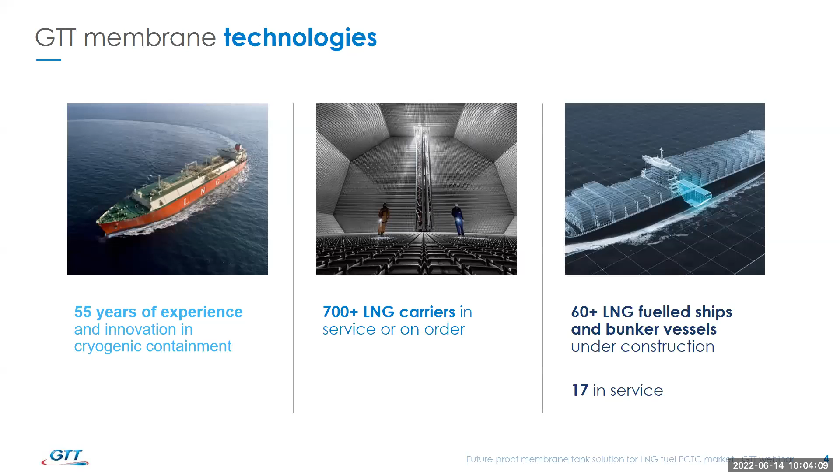What we see here is a successful milestone in the expansion of LNG as a marine fuel. It is a new reference on many aspects. World's biggest dual fuel vessel, biggest dual fuel engine, and biggest LNG fuel tank, alongside the biggest LNG bunker vessel. In November 2020, the CMA CGM Jacques Saadé, the first dual fuel ultra-large container vessel, loaded a full bunker of LNG from the Gas Agility chartered by Total, and it is more than 17,000 cubics of LNG, nearly 8,000 tons, transferred in about half a day, more than 5,000 TEU loaded while bunkering.

The LNG autonomy is such that the ship is able to complete an 84 days round trip between Asia and Europe without refueling. And here, you can see what's inside the LNG tank of this container vessel, a very wide tank of almost 52 meter breadth. The Jacques Saadé and all our sister ships are equipped with our Mark III membrane technology, benefiting from an excellent track record at sea. Those 9 vessels built in China are now successfully operating between Europe and Asia, and some of them actually already bunkered bio-LNG.

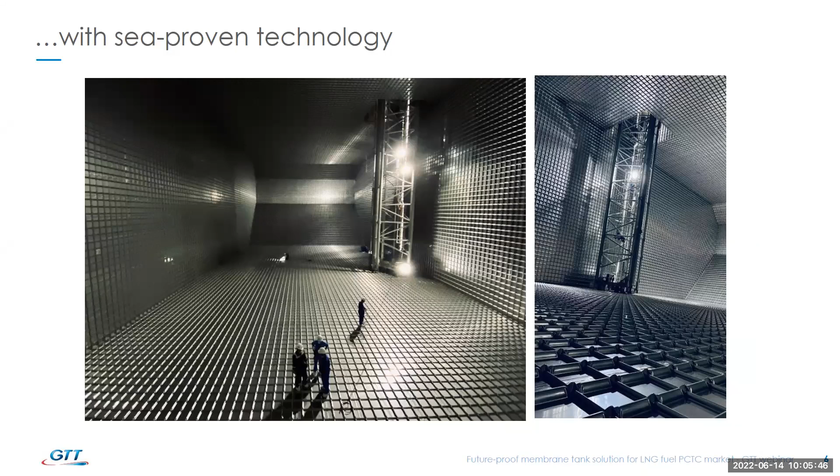Let's have a wider look at our references and order book. So it started in September 2017 when CMA CGM confirmed adopting LNG as fuel for this 23 kTEU. We are very happy to be a trusted partner for CMA CGM, who ordered a large number of additional vessels in 2019 and early 2021. Another great news was our first order in Korea with Seaspan, ZIM, and Samsung.

After mid-2021, we see a clear change with Korean yards turning back to membrane for new orders of containership. Even smaller size, such as the recent 7,000 to 8,000 TEU orders, equipped with smaller tank of 6,000 to 7,000 cubics. And actually, I did not include the additional container orders that we received a few days ago. But what about smaller size of tank?

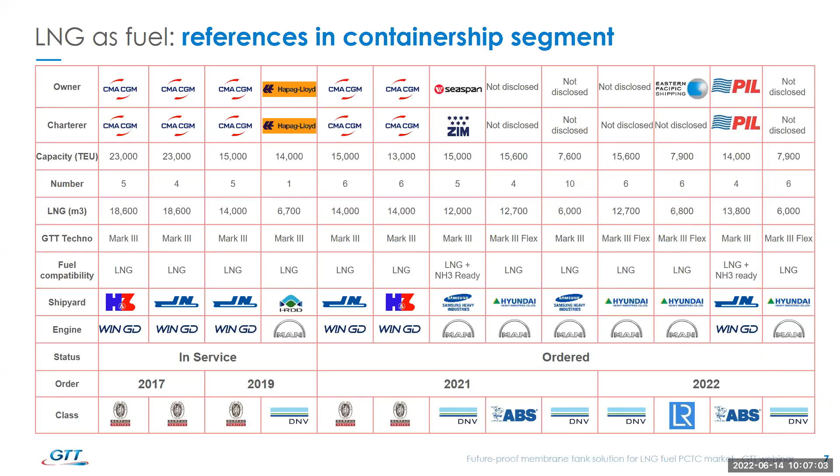On another ship type, GTT received an order from VARD of the Fincantieri Group for the most advanced expedition vessel of Ponant. This first cruise project, the design pressure of the tanks has been increased to 2 bar gauge for additional flexibility. This is a solution that we can now propose for tanks of a few thousand cubics, and we will develop more this point later on this webinar.

But let's see what is really making the difference. Initial ship arrangement included 2 bilobe Type C tanks. Due to standard shape, they can hardly store 3,000 cubics of LNG. Membrane tanks can store 4,500 cubics and save hundreds of square meters of deck on top of that, as you can see here.

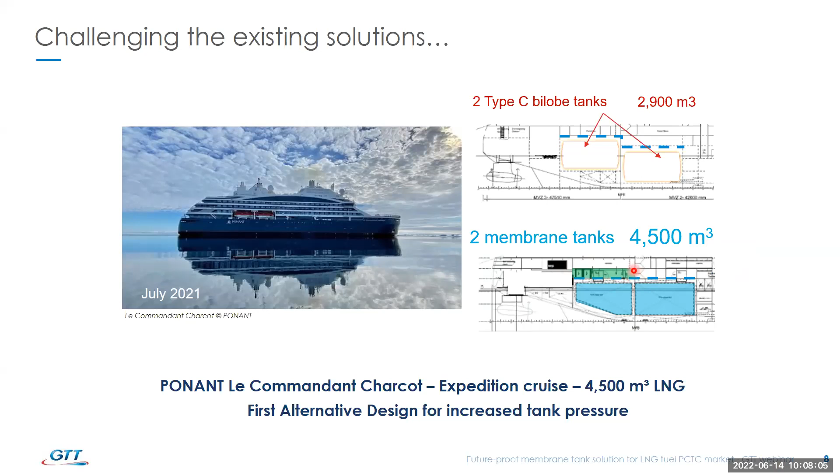And this is what the aft tank looks like when it's completed. We can see the specific tank slope, which efficiently follows the body lines for the aft tank, while the fore tank here has a pure rectangular shape. GTT Mark III Technologies allows to build LNG tanks with exotic shape to maximize the volume of LNG loaded on board. Thanks to these references, we are learning a lot, and we are now able to propose an efficient solution for the PCTC market.

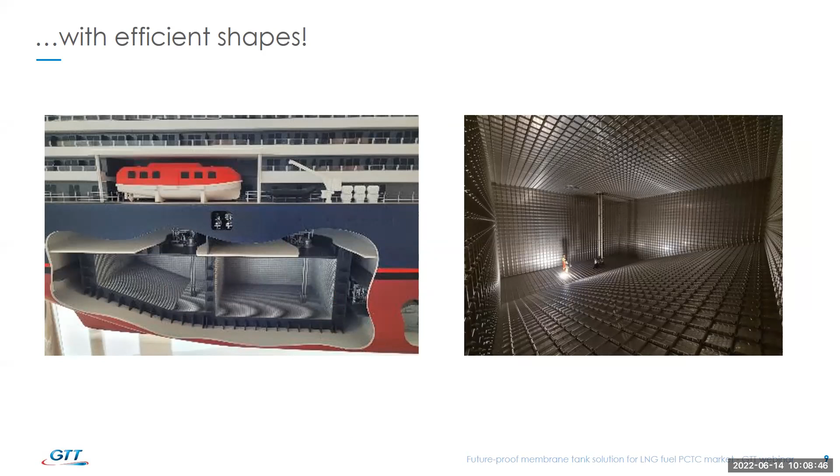So what does the PCTC market look like today? On this picture, you can see another of our references, the first bunker barge in the US, Clean Jacksonville, bunkering in February 2021, CMA CGM LNG powered PCTC equipped with Type C tank.

If we look at historical car carrier orders, we see that the market was very active between 2004 and 2007, and slowed down afterwards with a very low number of orders between 2016 and 2020. And it is currently very active again, with close to 40 ships ordered in 2021 and already 14 in 2022.

As it is stated here, the average age of the fleet is 16 years. So in the coming years, market analysts are forecasting that close to 30 ships will be ordered each year for fleet renewal, and also in order to comply with upcoming stringent regulations. Another very interesting point to notice is that the PCTC market has been the first one to operate a complete switch to LNG propulsion. 98% of the order book is LNG fueled, and all orders since 2021 have been ordered with LNG dual fuel engines.

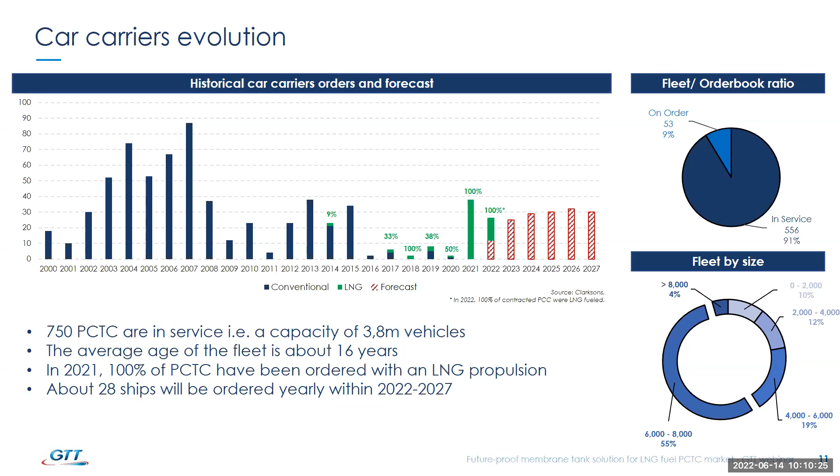If we have a look at PCTC ship owners, we can see that about 40% of vehicle carriers in service are owned by Japanese companies, followed by Norway. 50% of vehicle transportation capacity is owned by 7 players, quite equally spread between them. It is not exactly the same repartition for order books that you can see here, but there is still a majority of Asian owners.

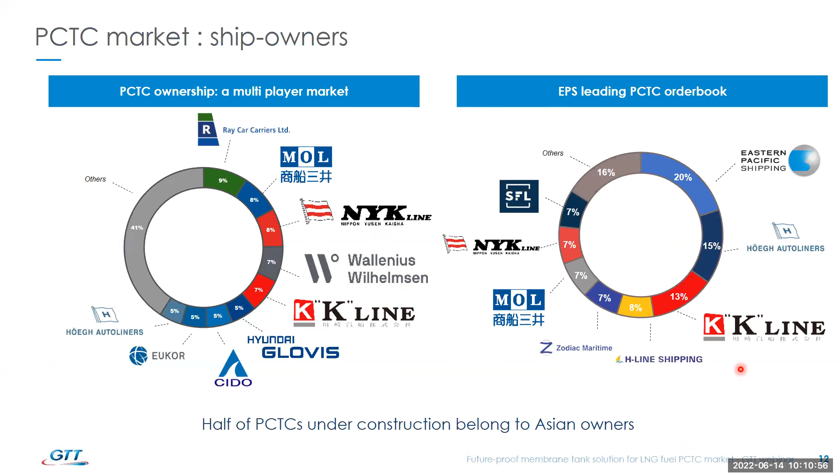Studying the main maritime routes of car carriers, we noticed that the main ports of call are in Asia, in Europe, and in North America. Considering round trips, we then estimated the endurance needed to reach these main hubs. In the end, we calculated the required LNG capacity to cover round trips between these areas. Having the possibility to perform round-trip voyages allows to save time and money, offering additional flexibility with the possibility to choose where to bunker depending on LNG price, and less bunkering operations needed. Finally, we ended up with a need for an LNG tank in the range of 2,000 to 6,000 cubics, depending on the trade.

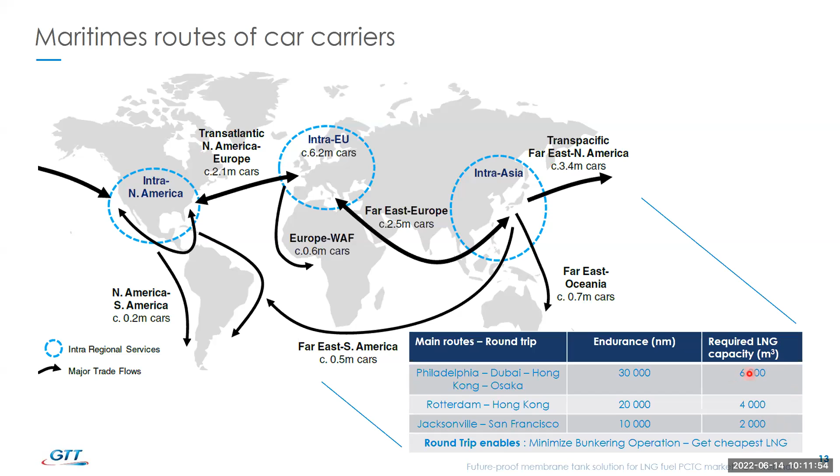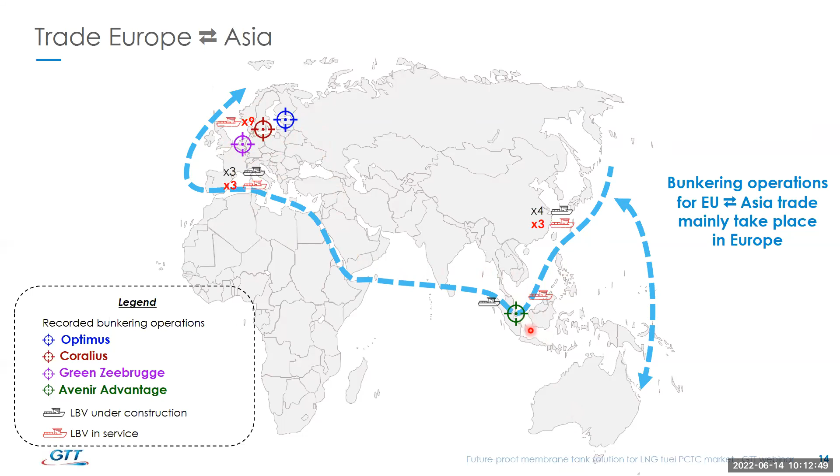We will now make a focus on the three main trades and track the bunkering possibilities in addition to the recorded ones. Here is a trade between Asia and Europe. It is to be noted that at both ends, LNG bunker vessels are already available and able to bunker LNG fueled vessels. However, Europe has a greater number of in-service LBVs as the bunkering network started to develop earlier there. On this long trade, most of the bunkering operations occur in Northern Europe with LBVs Optimus, Coralius, and Green Zeebrugge, with only a track record of bunkering with Avenir Advantage in Singapore for the Asian area.

For the trade between Europe and North America, some LBVs are already in service. So there is a wide choice in Europe, as we have previously mentioned, but we also have records of bunkering operations on the East Coast of America. They perform bunkering to LNG fueled PCTCs, such as the Clean Jacksonville to CMA CGM Confucius, as we saw previously, and also with the Q-LNG 4000.

On the trade Asia to West Coast of US, LBVs are available in Asia only. There is only one, under construction on the west coast of North America, and it is in Canada. We can see that the bunkering network is under active development, yet, depending on the trade, it can be interesting to have a good endurance and a round-trip capability.

Thanks to these insights, it is clear that having flexible design and optimizing the volume of the fuel tank is critical. So here come my questions to you, Jean-Guillaume. How to arrange the membrane tank and the LNG fuel system inside the PCTC, and what are the advantages of membrane technology for this application?

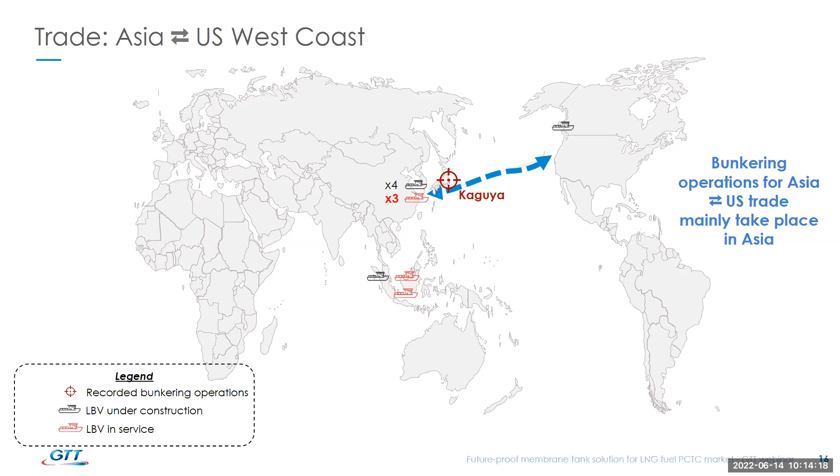Thank you, John. This is a good question. If you consider an LNG fuel vessel, you have to take into account that the energy density of LNG is half that of fuel oil. It means the LNG fuel tanks will have to be double compared with fuel oil tanks, which means it will interfere with some other compartments due to the increased size. So we decided to put it as low as possible, in front of the engine room on cargo deck number 1, as you can see on this 3D view.

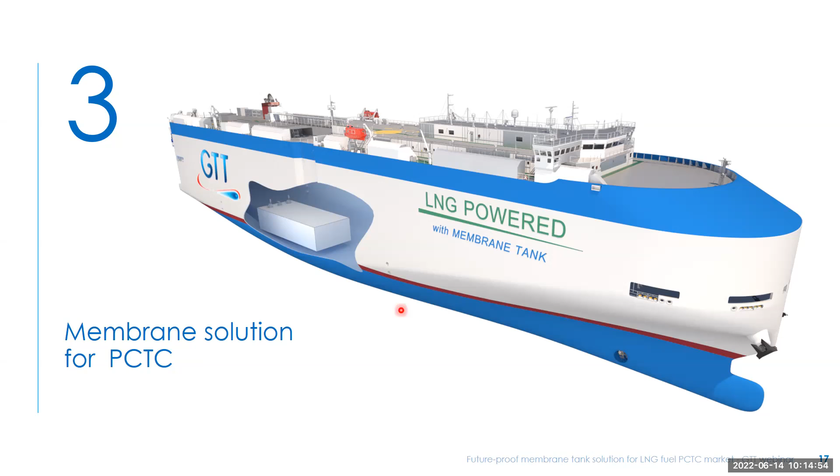And here, on this view provided by Deltamarin, you can see the overall arrangement of the membrane tank based on LNG fuel supply. The membrane tank has a very simple box shape without any slope. It has a narrow breadth, low height to stay below main deck, and has an adaptable length. We'll come back to this a bit later.

We consider a volume of 3,000 cubic meters. Also, it is designed to withstand 2 bar gauge internal pressure. The small circular domes are located on top of it at the aft end, enclosed in the tank connection space, which is not shown here. The fuel gas preparation room is located on the side of the tank, very near the engine room.

We worked a lot with Deltamarin on LNG fuel PCTC to come up with a relevant, sensible, and very compact solution.

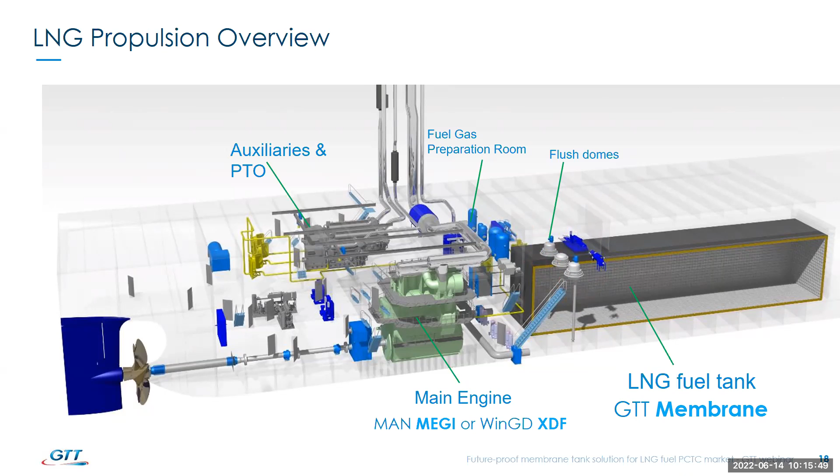The membrane tank is equipped with the Mark III Flex containment system. The insulation is made out of polyurethane foam and plywood, while the primary barrier is corrugated stainless steel, and the secondary barrier is located in the middle of the insulation. In addition, the thickness of the insulation can be increased, as you can see on the left picture, to reduce the boil-off rate, BOR.

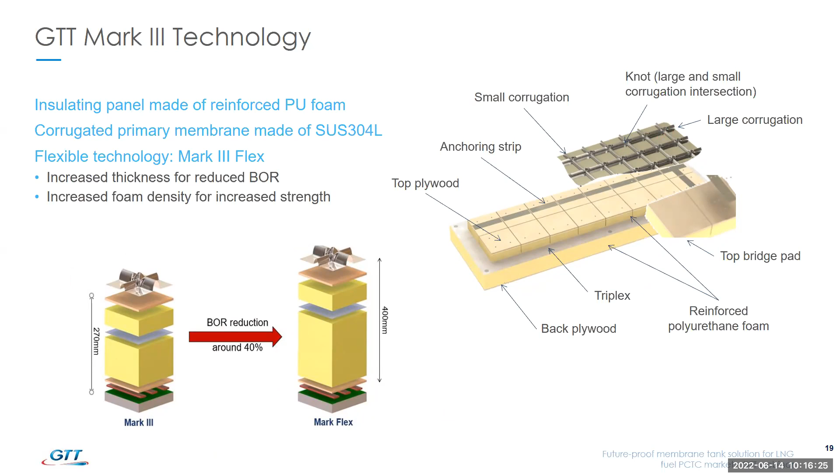Here we want to stress that the membrane technology is scalable. First, we are aware of the pillar rows, and we understand how important they are for the hull structure of the ship, so the membrane tank is designed to fit between them. There is no impact on the pillars related to the membrane tank. The breadth of the membrane tank is simply selected according to the location of the pillar rows.

However, the LNG tank capacity has to be decided with great precaution, because it will reduce the cargo capacity on the lower decks.

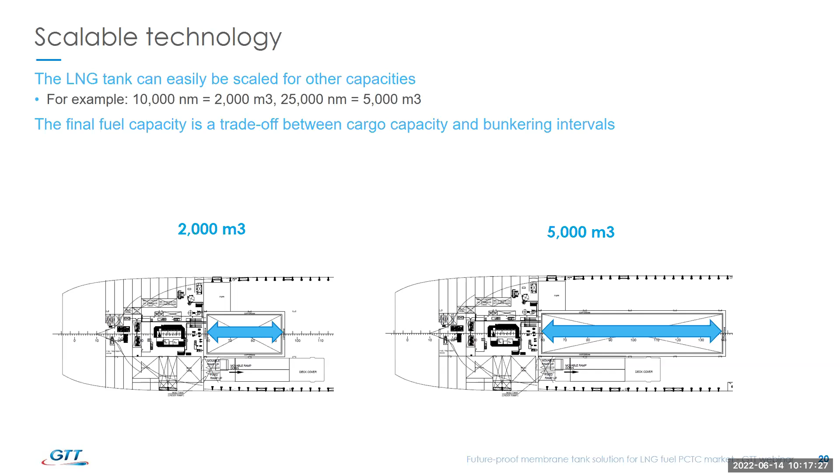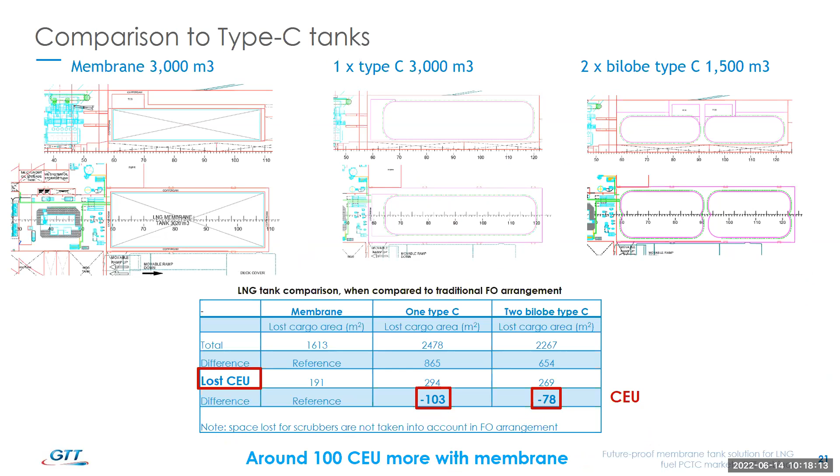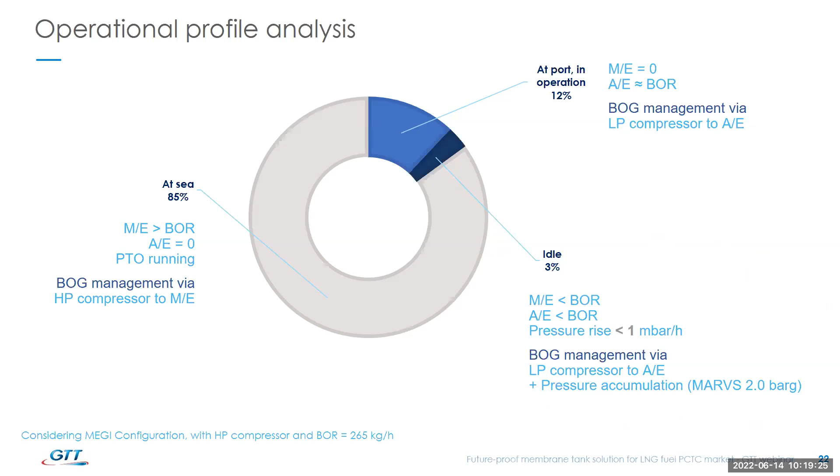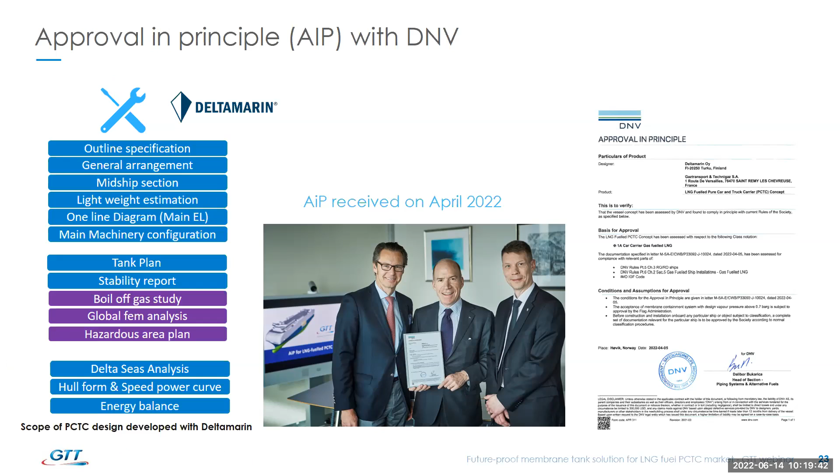To conclude this design section, we recently received an AiP from DNV for our work on LNG fuel PCTC equipped with membrane tank. You can see on the left the scope that was submitted, and in the middle the picture of the ceremony that took place at Nor-Shipping exhibition earlier this year.

Let's move to a new development we applied to this PCTC. Recently, we have developed circular domes applicable to LNG fuel vessels. They are smaller than the large rectangular ones used on LNG carriers, and they take less time to install at new building stage. They are also lower, and they have been developed to be applied to membrane tanks able to reach two-bar gauge.

So they fit really well on this PCTC. Talking about the two-bar gauge design concept, the idea was to offer the maximum autonomy and flexibility. This was first achieved thanks to an alternative design process run between Ponant, Bureau Veritas, and the French flag.

It also allows bunkering warmer LNG, thus offering more flexibility in the quality of LNG bunker. We are also confident that the 2-bar gauge design pressure is sufficient to meet all operational needs.

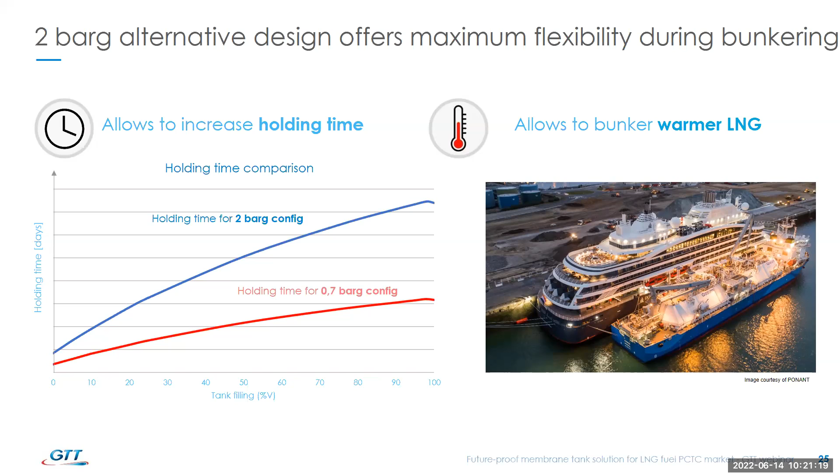This 2-bar gauge tank concept was then extensively validated by 3 major classes through AIPs. On the right side, you can see Commandant Charcot from Ponant, who benefited first from this innovation. This polar cruise expedition vessel has been delivered in 2021 and is currently sailing close to the North Pole.

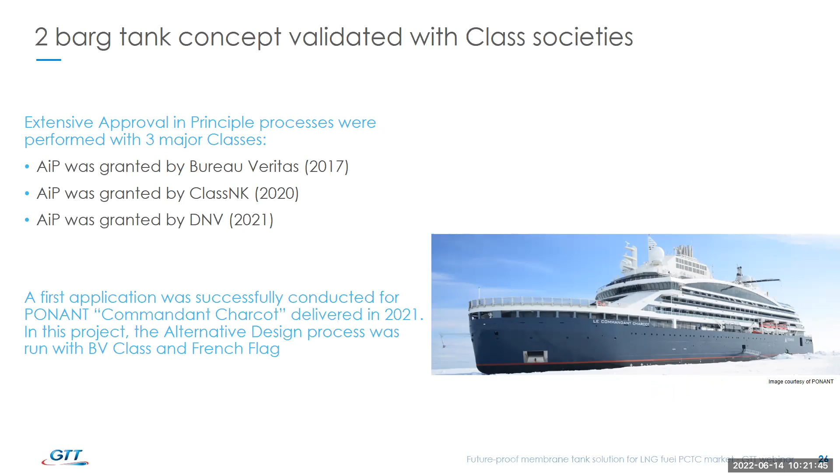Taking into account the will of the maritime industry, we are supporting the path to decarbonization by working on NH3, or ammonia, compatibility for membrane tanks. So let's have a look at NH3 readiness for a membrane tank solution.

We know already that no modification of the primary barrier will be needed. And thanks to its narrow breadth, the tank shape would already be suitable for ammonia sloshing loads, which are higher than LNG sloshing loads.

Then some adaptation would be needed on the inner hull to cope with higher loads and low temperature. In addition, we have already worked, and we are still working, with several major classification societies on ammonia-ready notation, mostly for container carriers.

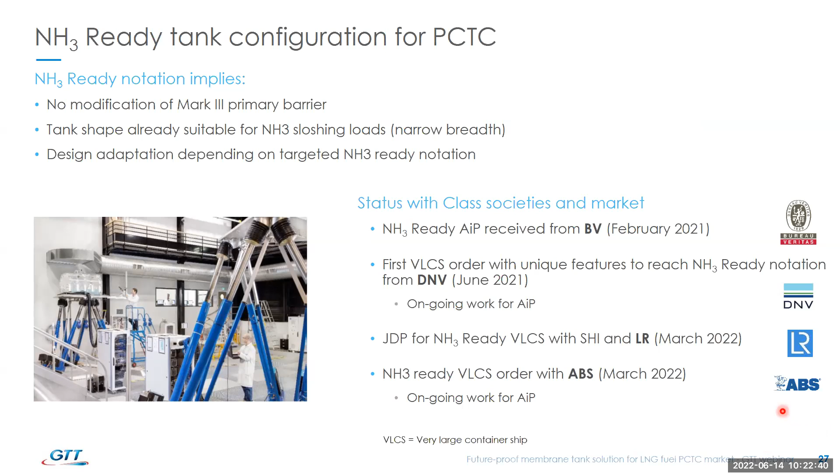Let's continue with a few words about our industrial schemes and partners.

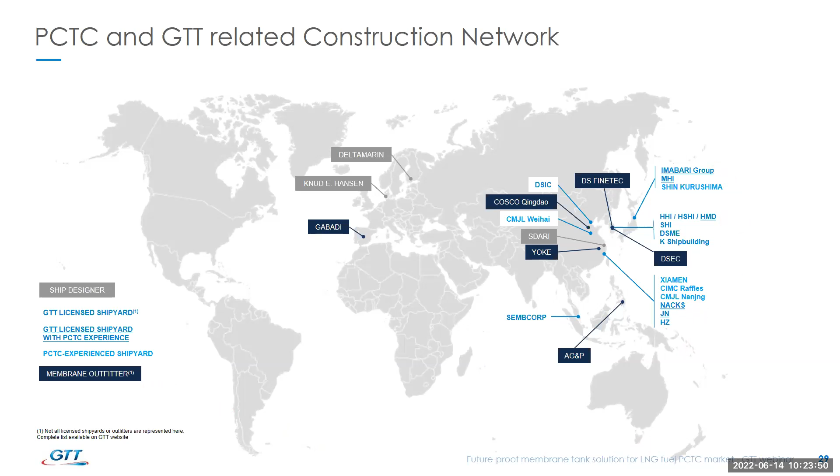They are the ones with the underlined name, such as Hyundai Mipo, Jiangnan, or Imabari. In light blue are PCTC experienced yards, but many of them do not know membrane installation. So we have added in dark blue boxes the GTT qualified membrane outfitters able to support the PCTC building yard with membrane installation.

Despite showing GTT has great ability to manage complex projects until completion, we do not foresee any application of this exoskeleton for PCTC, mostly due to the shape and location of the LNG tank in these vessels.

If the shipyard has experience with membrane installation, it can be done by its own workers. If it is a newcomer to membrane installation, it can be supported by a GTT qualified outfitter company that will install the membrane on behalf of the yard.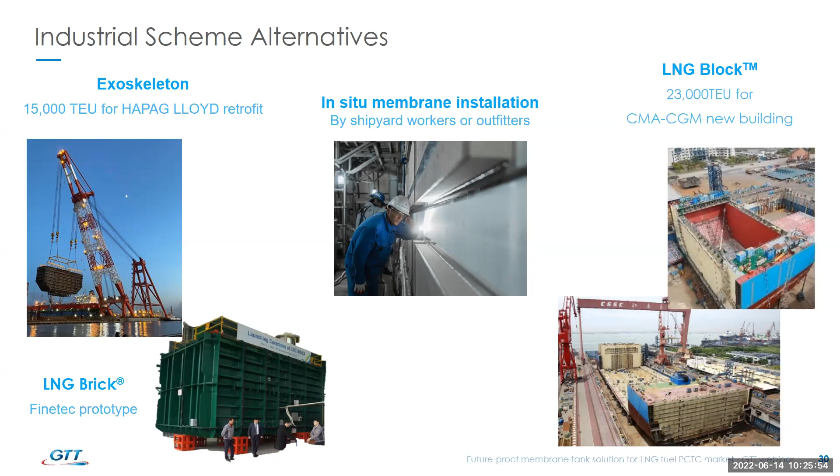That's all for this section. So back to you, John.

Our membrane tank enables saving a significant number of CEUs compared to Type C solutions and allows increasing the autonomy of the vessel. Thanks to this simple arrangement, the impact on the vessel design is limited. And with the recent developments validated by GTT and applied on LNG fuel ship projects, the membrane tank solution offers a flexible design with 2 bar gauge maximum pressure and a future-proof design with ammonia-ready notation. To conclude, you can get the most flexible and future-proof PCTC with GTT membrane tank.

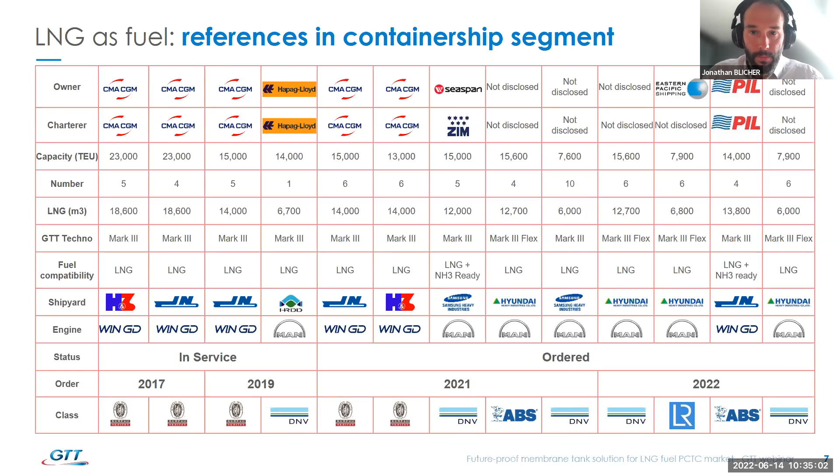So though we are mainly volume constrained, could you comment on the tank weight? For example, relative weight to fuel, function of pressure rating, perhaps. Thank you.

Okay, so to answer this question, let's take a hypothesis of the size of the tank. Let's consider a 3,000 cubic meter membrane tank, including the 2 bar gauge pressure. So we performed a study with this kind of tank with the shape I showed previously, and we estimated that the weight of the structure is more or less in the range of 700 tons added, included in the containment system. And it is all inclusive, I mean there is already the 2 bar gauge pressure design taken into account in this value.

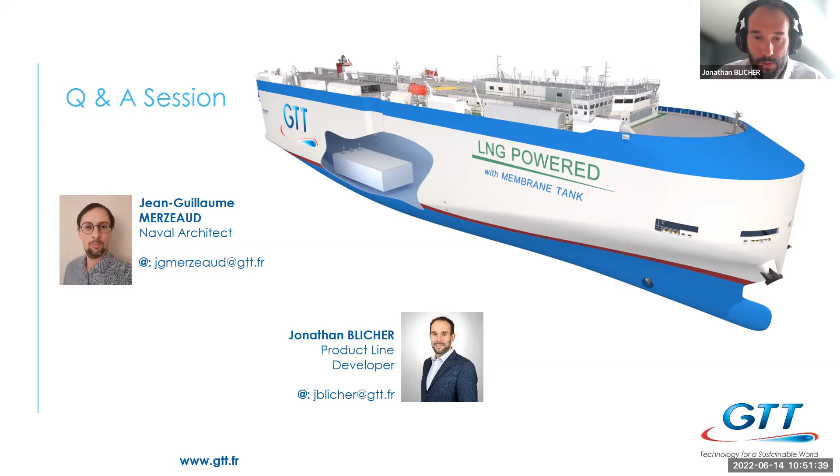Second question: what future fuel are you investigating at the moment? Here again, two answers among the possibilities of LNG, bio and synthetic LNG, bio and synthetic methanol, green ammonia, and hydrogen or fuel cell. The two leading this question are LNG in first place and ammonia in second place. Quite tight results, 37% and 33%. And we can see that bio and e-methanol is starting to be more studied than before.

We actually asked this question a few months ago on another webinar, and methanol was not studied as much. We can see that it is now studied more, could be from recent news in the market. But good to see that LNG is still leading this trend.

The last question was about, in your opinion, how long will LNG last as a fuel for PCTC? Here the audience is selecting the 10-year horizon. Second choice is 20 years. So we can see that this is something that is seen quite for the long term, almost the lifetime of the ship for 20 years.